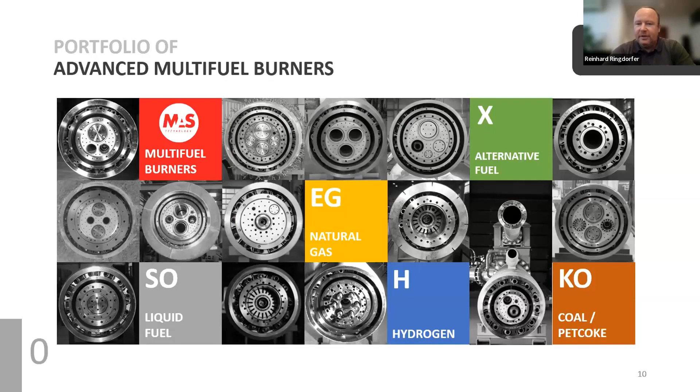Which is available in numerous executions for multi-fuel. There is one special execution for natural gas. We are doing also tests with hydrogen, traditional fuels, alternative fuels. Everything is available. So if you need any more information, you just go to our homepage or contact me, and we'll give you some more information.

Okay, now starting with the secondary fuel. We heard a little bit about the theory here. You can see some pictures. There are numerous secondary fuels available in the market. Some are well prepared, some are not so well prepared.

And we have to differentiate fuels which can be used in the kiln versus which can be used in the calciner, because even the best burner cannot use fuel with too high moisture, too many 3D particles, or too big particles.

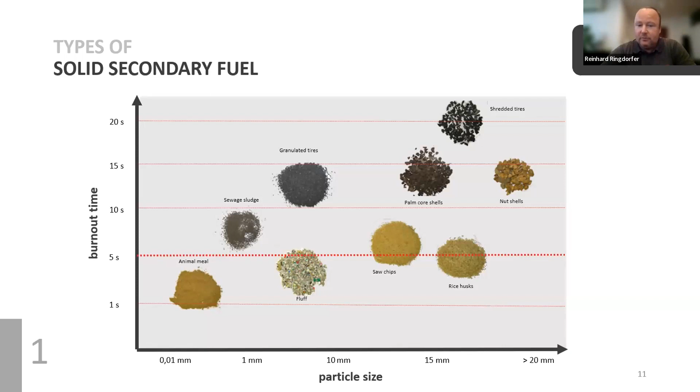We have made several inventions or devices for the secondary fuel channel in the burner for more than 20 years now, to influence the behavior of the particle coming out of the burner. The last invention is the pneumodeflector, which has also been in use for more than 10 years now. I will go to that a little bit later.

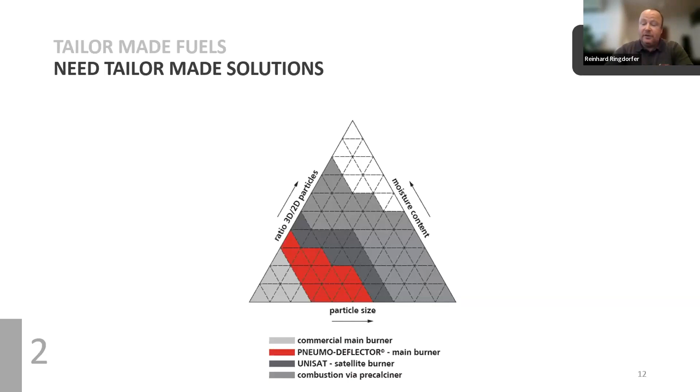So here you can cover a little bit bigger area. The next step would be the satellite burner, where we still have a little bit more freedom in regards of size or humidity or moisture of the particles. And the rest, which was also explained earlier, is combustion in the pre-calciner, because you don't need a really defined flame in the pre-calciner. You just need to release the heat, not at a specific point. And of course, you also have a higher retention time in the calciner.

For most cement plants here in Europe, it's very common to know what to do when you fire secondary fuels, because they've been doing it for 2 or 3 decades. But there are some things which need to be taken care of when you want to start firing secondary fuels in the rotary kiln.

First of all, compared to primary fuels, you need more oxygen content in the kiln inlet, usually around, we recommend 3 to 5% in the kiln inlet, to ensure a complete combustion and to ensure that you have no CO present at the kiln inlet.

Also, we heard before that depending on the secondary fuel you're using, you have to adjust your raw mix to get the desired results of your clinker quality. Most of the time, if you're using RDF, some kind of plastics, or anything else, you're introducing additional sulfur and especially chlorine into the system, which we all know tend to form cycles in the kiln preheater and can lead to blockages in the preheater itself. So this has to be considered.

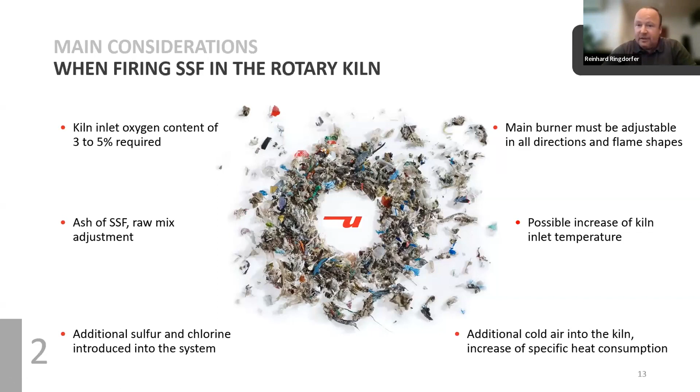As I said before, shortly after our focus on the rotary kiln process in the cement industry, we delivered the first burners with secondary fuel firing capabilities, so with a simple pipe through the main burner. And since then, we were looking for solutions to increase the amount that can be fired through the main burner by somehow influencing the particle when it leaves the burner.

So in the latest device invention we are using is the pneumodeflector, which has been around for the last 10 years. The goal is basically to deflect the particles above the kiln burner axis to alter the flight path, and to extend the residence time, the flying time, and therefore the combustion time.

Here in the picture, you can see a burner with two of these secondary fuel pipes, and you can see the openings here with different angles. Usually this is supplied by the primary air fan, can also be supplied with a separate blower, and can be adjusted from the cold side of the kiln.

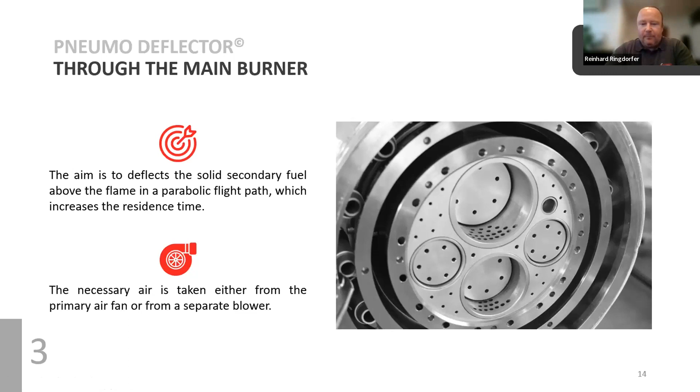Here you can see the theory behind this. We have tried different approaches, increasing the injection speed, using swirl and so on, but ultimately only the deflection of the particle above the kiln axis will give you an increase in residence time and therefore more time for combustion of the particles.

That's why, in this regard, at least what we have seen by using the pneumodeflector, we can increase the secondary fuel amount through the kiln burner, with the same clinker quality, by 5 to 10%, depending on the fuel, of course.

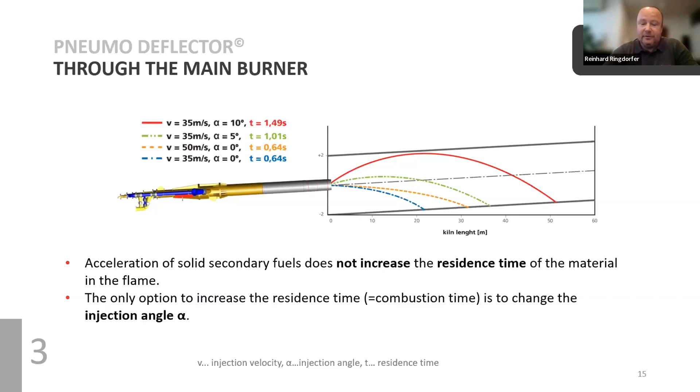Also, over the years, we have developed two different possibilities to introduce the material into the kiln through the burner. First, obviously, we have the circular channel, which is the standard execution. But of course, with this pneumodeflector, which is an independent air supply to the nozzle at the bottom of the secondary fuel channel, it needs a certain space. And if you have to build a bigger central channel, the rest of the burner will be bigger, heavier, and more expensive.

The advantages are very clear here. Due to this pipe-in-pipe system, we are able to take out the secondary fuel channel during operation if there should be any kind of damage to the channel. The deflector air can be adjusted independent of the central air, but as I said before, it requires more space in the center. The other solution is the semicircular channel, which is a half-round channel, more or less. Of course, on the back side, you will have a normal flange connection.

This is installed inside the burner as a complete insert, so there is no way to take it out separately. So if there is damage, you have to take out the complete internal of the burner.

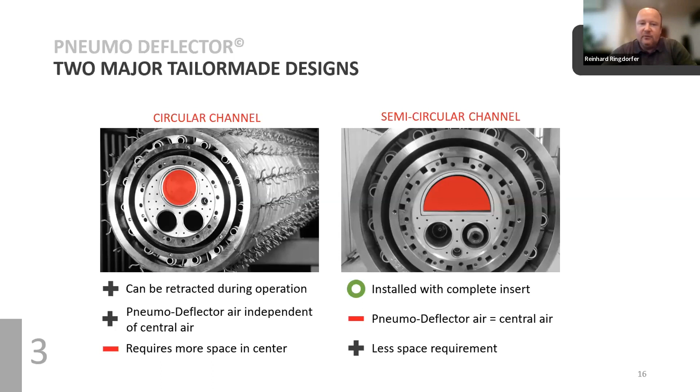The deflector air is used from the central air, so you can adjust only central air and deflector air together, not separately. But on the plus side, you have less space requirement. It's much smaller than the other execution, so you get a smaller kiln burner. Depending on what is the target, how much you want to fire, and what are the limitations of the kiln, we can choose both of these options.

All right, now let's come to the satellite burner. Some basics, more or less.

The satellite burner has been around for, I don't know, 30, 40 years already. I know of cases from the middle or end of the 80s where some plants in Germany started injecting just through a fixed pipe, beside the burner, above the burner. But a naked pipe tends to burn down in this atmosphere, and the results were not really satisfying. So by the end of the 90s, beginning of 2000, when secondary fuel firing started, Unitherm and also I think all the other suppliers decided it would be much better to fire the secondary fuel through the burner.

A few years back, actually in 2014, we started to get back to the satellite burner design, and we started to do our first tests.

There are some obvious advantages compared to firing through the kiln burner. First of all, the location of the satellite burner means you have a high amount of oxygen available, and a very high temperature coming from the secondary air. So when injecting the material, you start the process that we heard before.

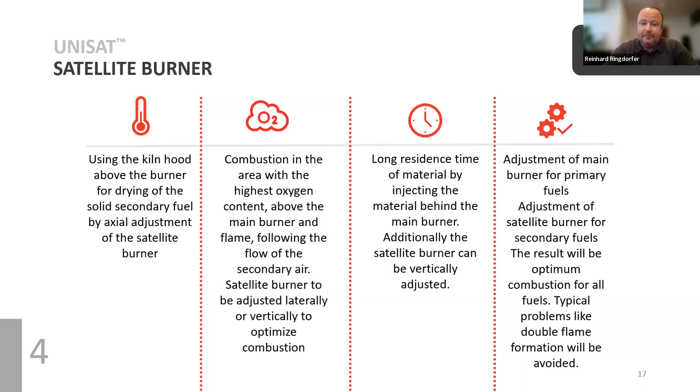As I mentioned before, usually the satellite burner is located a certain distance behind the burner tip. Here you can see the execution where the satellite burner is directly on top of the main burner.

It's actually located on a small burner trolley, which gives you the possibility of adjustment of plus minus 500 millimeters in axial direction. And if it's located on the burner itself, you also have the possibility of vertical adjustment of the tip of the satellite burner.

Horizontal adjustment will also be included if the satellite burner is located beside or above the main burner, not if it's sitting directly on the main burner.

This always depends. If the satellite burner is delivered with a new main burner, then it's easy because you put it on top. But if you install it at an existing location with an existing burner trolley, then you have to find the spot where you can put the satellite burner.

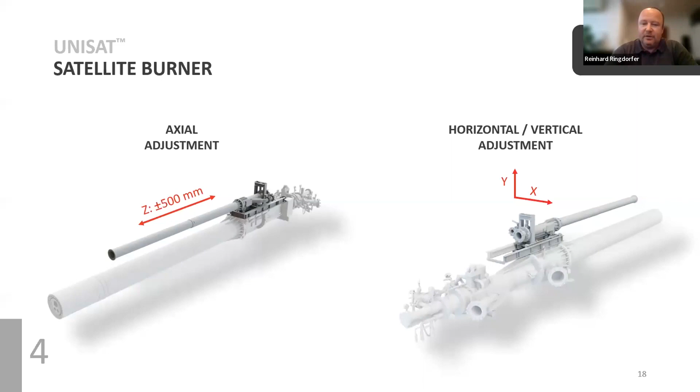With our satellite burner, it's possible to have both executions. So you have the suspended design burner trolley, where we can use either the frame or the support beam as burner trolley for the satellite burner, or it's possible to have supports, depending on the space availability below the main burner, so we can have the satellite burner on top.

Floor-mounted design is much easier because there's nothing on top. So as you've seen before, you would just put the rails on top of the main burner, and then the small burner trolley with the satellite burner.

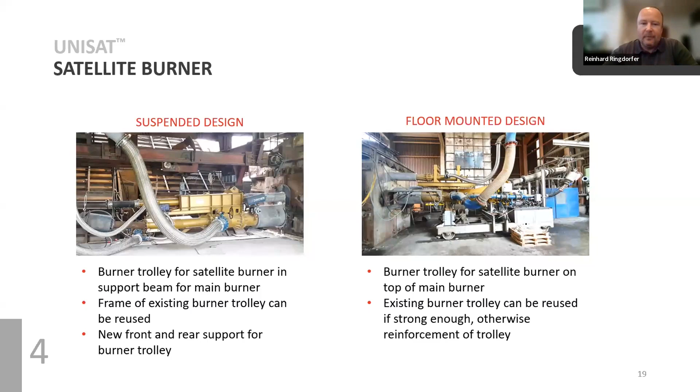Okay, so much for the theory. Now I have 3 case studies, starting with the first study, which is a small cement plant in Austria.

The target there was a plant using an older kiln burner, around 2017. Even though they were using high-grade material, they were limited to 50% secondary fuel replacement in the rotary kiln, and we're talking about only solid secondary fuel. So we were assessing the situation.

We offered the burner. Due to the size of the kiln, and since satellite technology was not very common at that time, the client and ourselves decided to go with a 1-channel inside the main burner. The guarantee figure was that we need to reach 70% secondary fuel substitution.

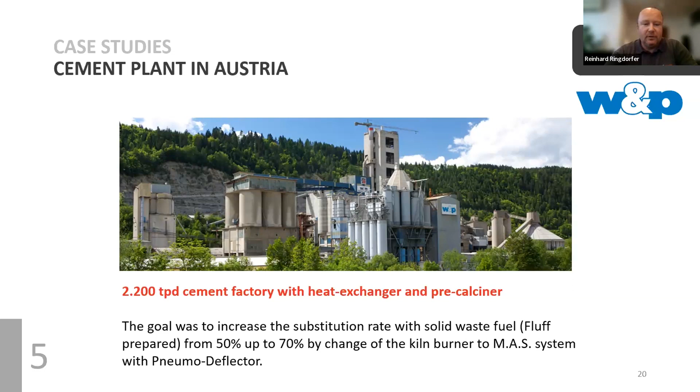So here you can see the installation and the burner. It's a small burner, 35 megawatts, using mainly coal and petcoke as primary fuel. Natural gas is used for heating of the burner, and we have one channel with solid secondary fuel, which you can see here with the pneumodeflector nozzle. And as I said before, material was very well prepared.

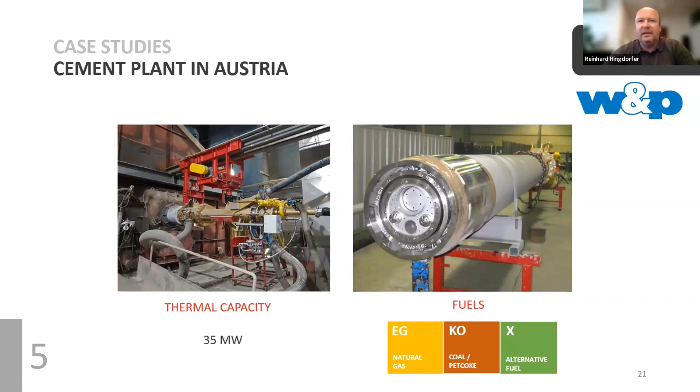If I say very well prepared, we're talking about less than 5% moisture and very fine material. So the commissioning of the burner was done, and the 70% were immediately reached. After optimization, the substitution rate at the moment is somewhere between 85 and 100%.

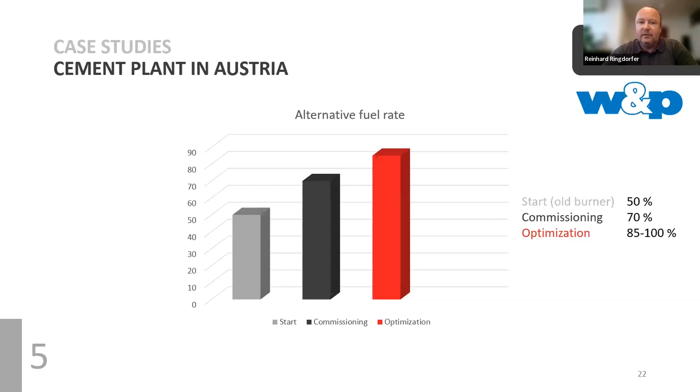For your information, the 100% is because the plant is now running at lower than design capacity, so they are allowed to fire 100% because they have a certain limit. If they're running at full capacity, they go over this limit of what they can fire at the moment. But at lower capacity, they can go up to 100% secondary fuel firing, using only fluff at the main burner.

Okay, the second case study is a cement plant in Greece. It was a very similar scenario. They had an existing burner and quite good material, but they were limited to 5 tons per hour of secondary fuel firing.

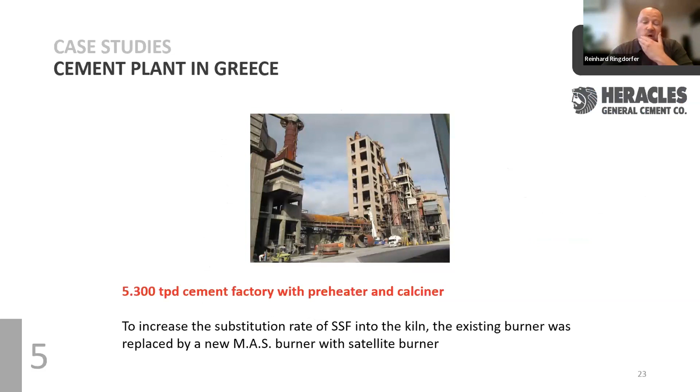So they decided to install a new M.A.S. burner with a satellite burner. This is the picture you saw before, also with the suspended burner trolley, a thermal capacity of 100 megawatts, again coal and petcoke as primary fuel, fuel oil for startup, and of course alternative fuel.

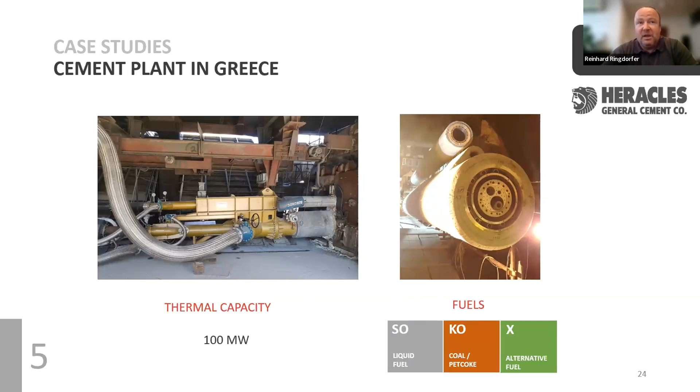In this case, the alternative fuel is only supplied through the satellite burner. Some other clients want to have maybe a safety pipe through the main burner too, but in this case it was only the satellite burner. The result: with the old burner it was 5 tons, and after commissioning the guaranteed 7 tons per hour were reached. After optimization, depending on the material, they can go up to 9 tons per hour.

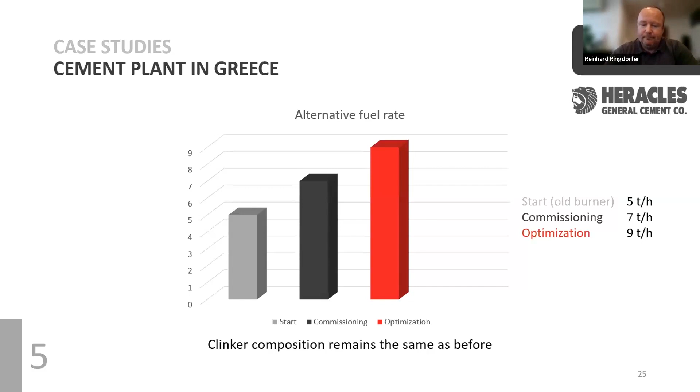For the third case, again a plant in Austria, very close to Vienna. They have the Unitherm burner since 2003, so almost 20 years now. Here they were already running on a very high secondary fuel rate. In this case, the increase of secondary fuel firing was not the first target, but to stabilize the process and make it easier.

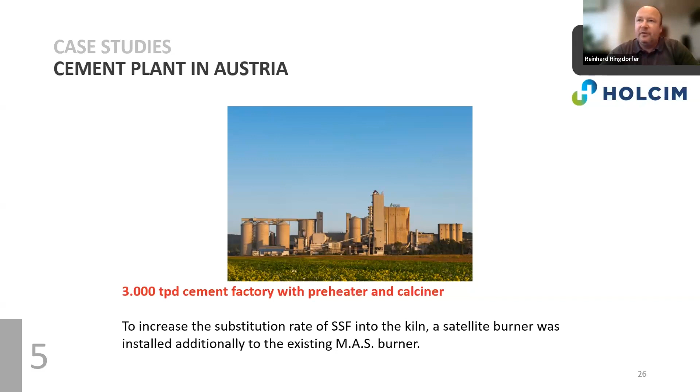So also here a satellite burner was installed, as they needed to increase the material. The capacity was 49 megawatts, again coal and petcoke, liquid fuel with alternative fuel, and we installed the satellite burner on top.

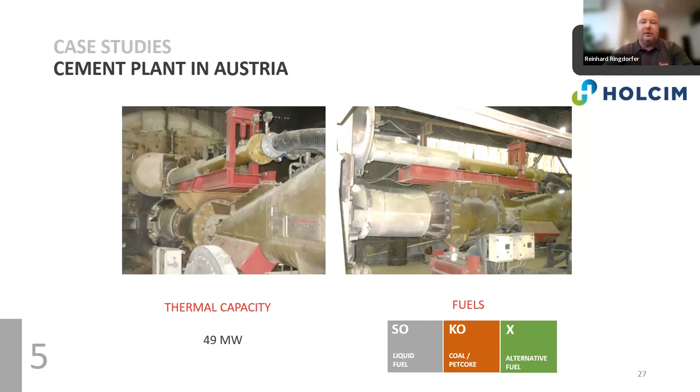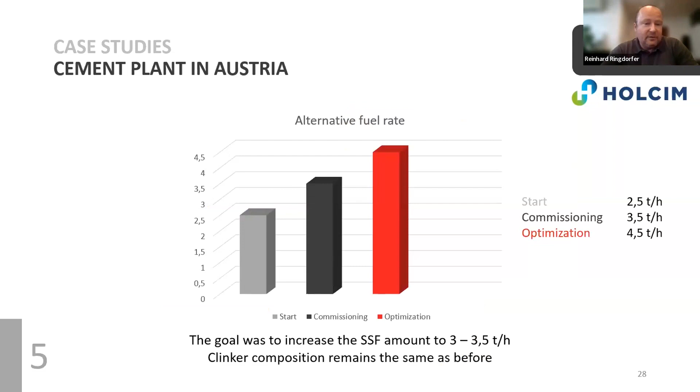Start was at 2.5 tons per hour. Commissioning reached 3.5 tons very quickly, and after optimization, we were able to reach 4.5 tons substitution rate at the main burner.

So this is just an outlook on how we see the firing of secondary fuel in the last years and also in the future. We started, as I said, in 2015, and we have increasing numbers of satellite burners. Up to now, we have more than 50 satellite burners installed, some in project phase or in manufacturing. With the exception of 2 or 3 clients, we see the tendency clearly going toward satellite burner technology.

Because of obvious reasons: first, it's sometimes easy and sometimes not so easy, but you can retrofit the existing system with a satellite burner. Or if you buy a new burner and have the choice between a burner with a secondary fuel channel inside or a satellite burner, the costs are on a very similar level, and you have more freedom and more adjustment possibility with the satellite burner solution.

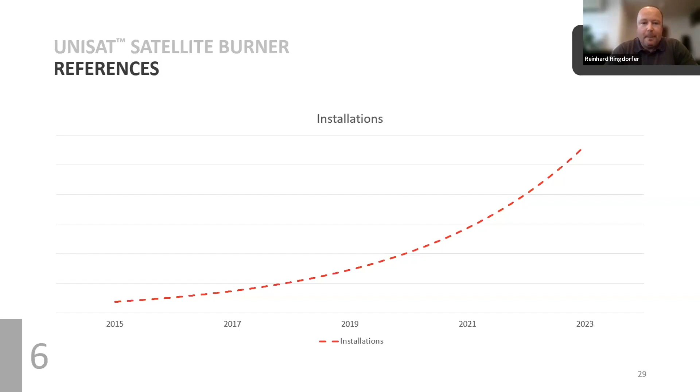Thank you very much, Reinhard. A really interesting presentation and some nice case studies towards the end.

Yes, they also use it in the calciner. Yeah, a few questions are here.

You answered the question I was going to ask, about retrofitting. Is that normally quite straightforward, or does it require specific features in the kiln to allow a retrofit of a satellite burner? Well, first of all, the kiln has to be big enough. As I said, like in Wietersdorf, if you have a kiln which is 3 or 3.5 meters in diameter, it's most of the time a little complicated to put something above the main burner and get the desired results. Also, especially with suspended burner trolleys, several decades ago there was just the burner and a hole for poking and looking, but now you have cameras, sensors, everything.